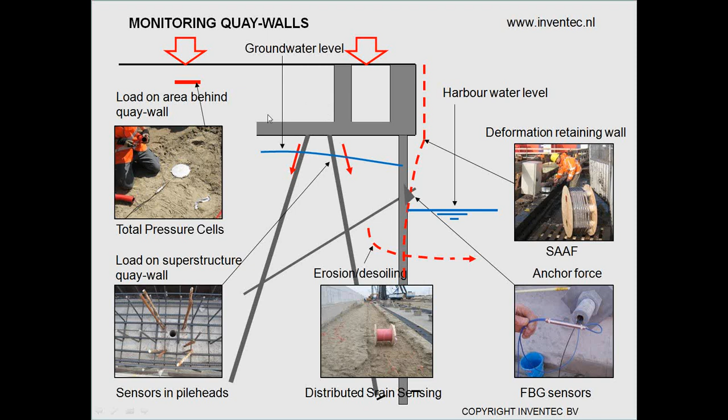And last but not least, of course, the groundwater level in relation to the harbor water level represents an important semi-dynamic load on the whole of the quay structure. On the next slide, it is interesting to ask yourself the question: why should you monitor a quay wall? Generally, there are a couple of reasons that are quite common for structural monitoring: it gives insight into structural condition, it reveals design or construction errors in a timely manner, and it enhances the knowledge on structural behavior.

But there are a couple of things that are of particular interest for quay walls, in particular that it discovers deficiencies that develop with time. This is a tool for scheduling preventive maintenance with the aim of extending the lifespan of the structure and saving on the total cost of ownership. When you start monitoring only when something is really happening, the costs are much higher, and you may still not get the right picture. Then it shows hidden reserves. That is also of interest for quay walls. During the life of a quay wall, its purpose may change. For instance, an ore terminal may become a container terminal, and then there's the question: can it withstand a load that it has not been designed for originally? It can be hard to determine this if you lack the historical structural behavior of the quay wall.

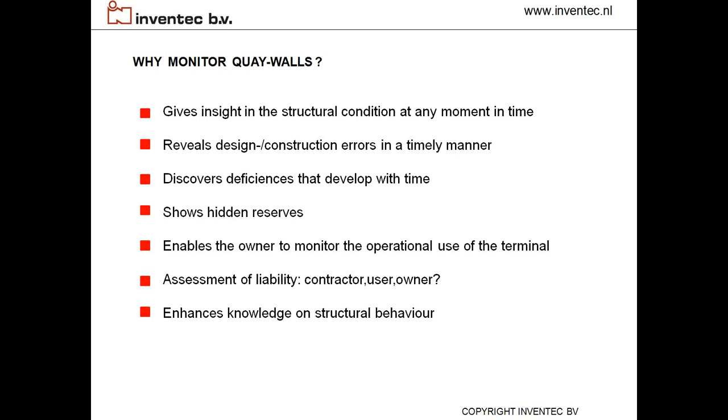Now I would like to go into more detail on the individual monitoring applications. First of all, the potential erosion of the subsoil behind the quay wall. What we apply for this monitoring phenomenon is distributed strain sensing along an optical fiber.

Well, for most of you, it will be clear how this works. It's basically such that a reading unit constantly launches a high frequency pulse of light of a particular wavelength into an optical fiber, and measures the shift of the so-called Brillouin frequency in the backscattered light. If there is a strain on any point in the fiber, the Brillouin frequency or wavelength changes, and

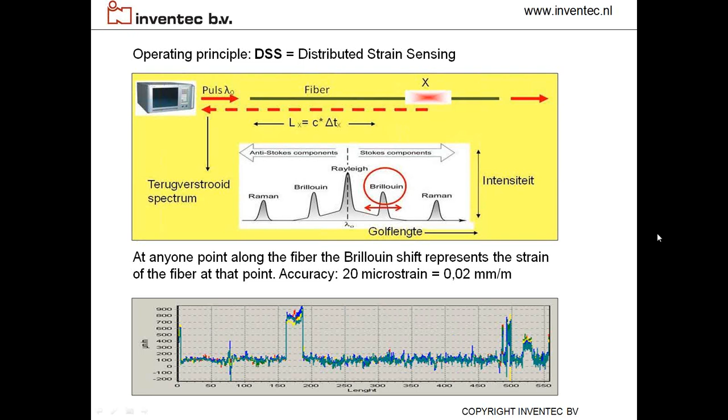And what now happens in actual fact is that the fiber is installed in the soil behind the quay wall, and the strain is a measure for the subsidence or collapse of the soil, or for the erosion. And you see that typically in this case here you see an apparent increase of the local strain, and that is a clear indication that there's a major subsidence in the soil behind the quay wall, which may have been caused by erosion.

This is a true picture of one of the monitoring systems that we installed in the port of Rotterdam, and this is a quay that is 550 meters long. At the spatial resolution of 1 meter, you have the equivalent of 550 spot sensors, and this gives with an accuracy of 1 meter where the erosion or the subsidence is happening.

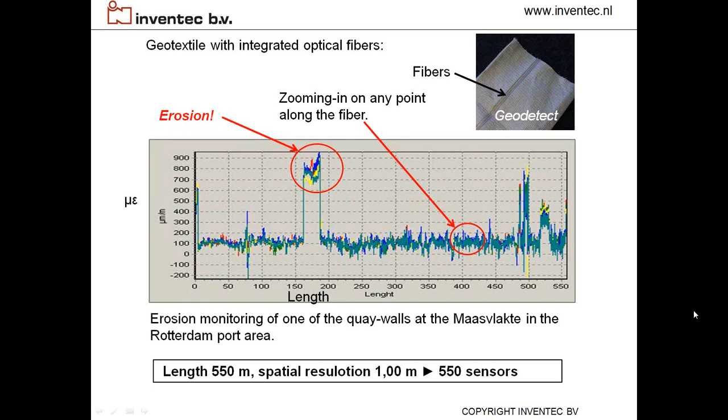And this is how it looks in practice. There are two ways of installing the fiber. You can take a couple of fiber cables, but you can also use an optical fiber that is integrated in the geotextile, which has the additional advantage that it is stronger. The geotextile retains the force, so the fiber does not break even with larger major collapses of the soil.

You see here where we install the fibers. They are installed underneath the structure, but behind the retaining structure.

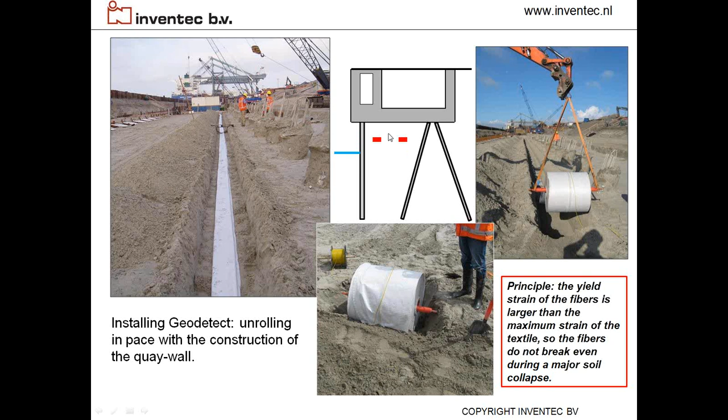Now you could say, well, is this such a big issue? Should we really do that? But I think these pictures that are actually taken from the subsidence of a quay wall in the Rotterdam area show that erosion monitoring is absolutely not an unnecessary luxury. This is, by the way, not an old quay wall. It was a quay wall that had been completed 4 months before. So even in an early stage, these things can easily happen.

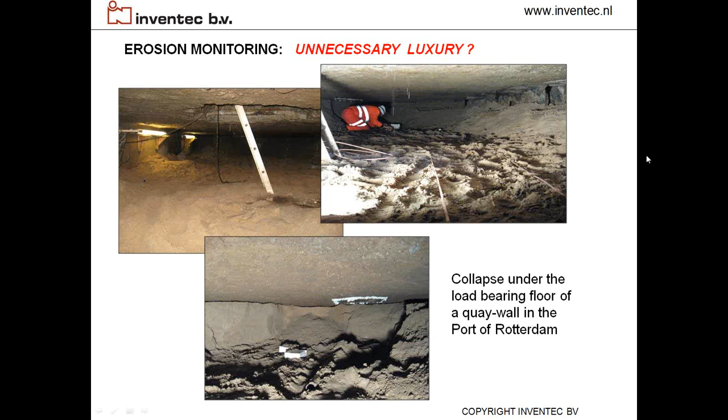And the importance of an early notification of a subsidence is, of course, that you want to avoid major catastrophes. If you don't have a monitoring system, the erosion and the desoiling progresses and can cause a major collapse on the surface of the terminal.

For visualization, we normally use DiView, which is a software package that has been developed by SMARTEC, and it can be used to easily visualize in real time where critical events may be taking place along the length of an erosion monitoring system.

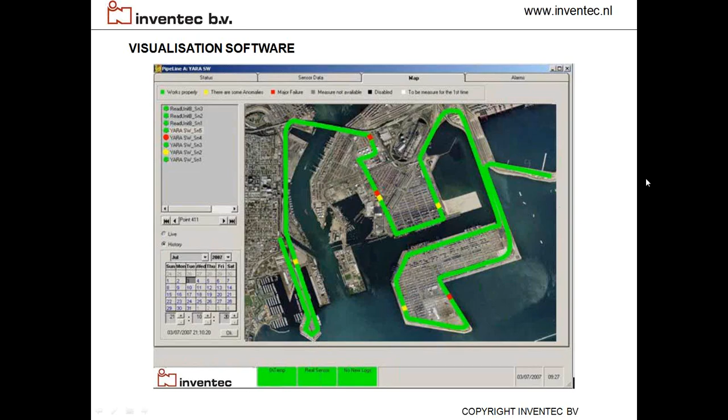And then subsequently the core of the anchor is grouted up with non-shrinking grout. Now after hardening, the grout serves to transfer the strain from the anchor to the sensor.

For the measurement of the pulling force of the anchor, the sensor is typically placed at a relatively short distance behind the anchor bolt, because at that location the anchor is free to move, to strain, as the friction with the surrounding soil is negligible, so that a true relation between strain and force can be established.

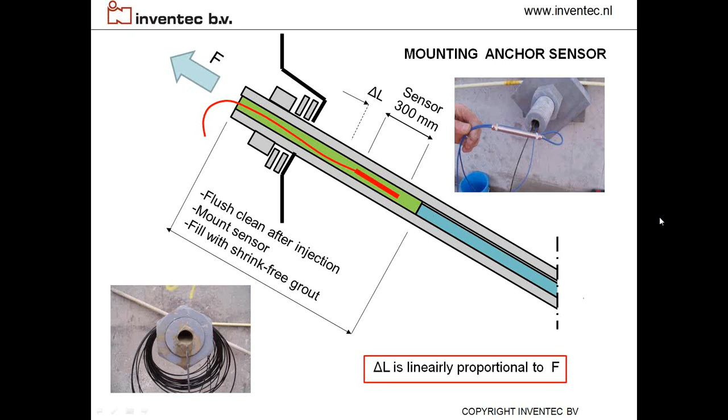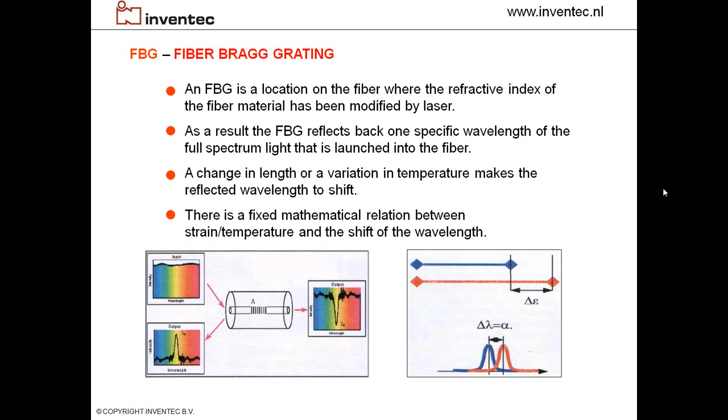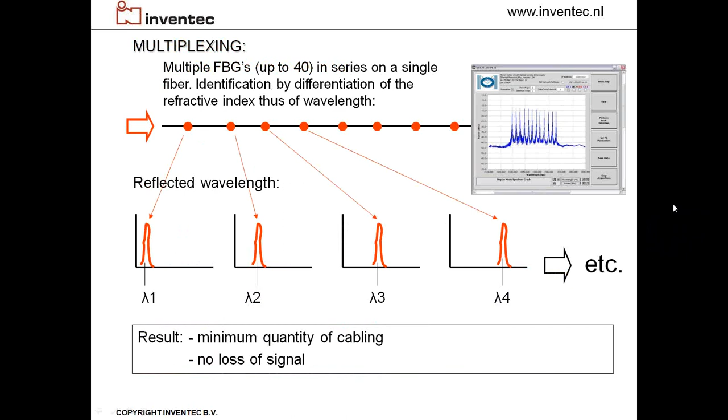The type of sensor we use for anchor monitoring is based on Bragg gratings. I assume that the people in the audience have sufficient knowledge to understand how that operates, so I will not go into further detail about that. Multiplexing will also be a known possibility of FBG sensors.

Sorry. I have to go. No, I have to go back. Yeah.

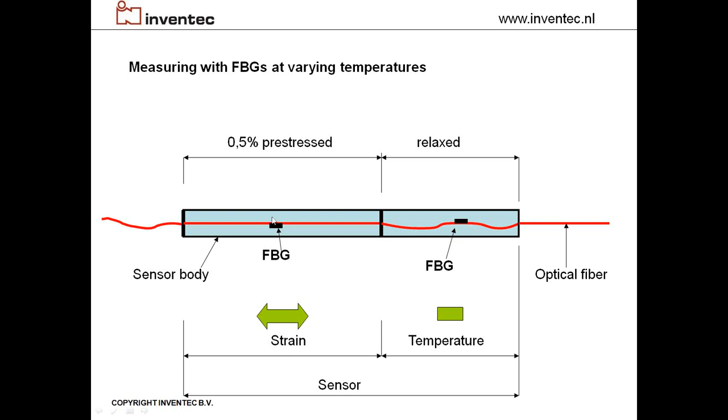The shifting of the back reflected wavelengths is caused by both strain and temperature changes. So you need to have two FBGs in line, one that is relaxed and one that is pre-stressed. The relaxed one only measures temperature, so that you know how much you have to compensate for the sensor that measures both strain and temperature.

Now, the point is that the asset owner obviously is not interested in strain, but wants to see the actual force that is exerted on the anchor. And the conversion of strain into force is done during the tensioning of the anchors in the field. During the subsequent tensioning stages, the strain sensor and the temperature sensor are read out, at the same time marking the force readings from the tensioning jack.

This then establishes the relation between the strain and the force at the time and the circumstances of the tensioning of the anchor. But of course, in the software, the measured strain has to be compensated by the reading of the temperature sensor, and of course also the thermal expansion or shrinkage, as the case may be, of the material of the anchor, so the steel expansion or shrinkage. And that is an exercise that has to be done before it can be made operational.

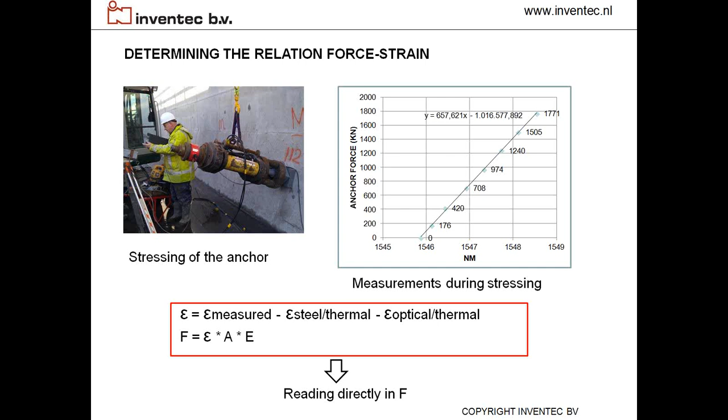For economical reasons, not all anchors will be fitted with a sensor; measuring the forces of only a representative number of anchors along the length of the quay wall will give a representative picture of what is actually happening.

Calibration is done in the field by putting known weights on the superstructure and taking the strain reading from the sensors. And as with the anchor force sensors, also here the strain readings obviously are compensated for changes in temperature. And here also a representative number of sensor containing piles will be sufficient to give the adequate information of how the quay is loaded. And the Port Authority receives an alert or alarm whenever preset levels are reached.

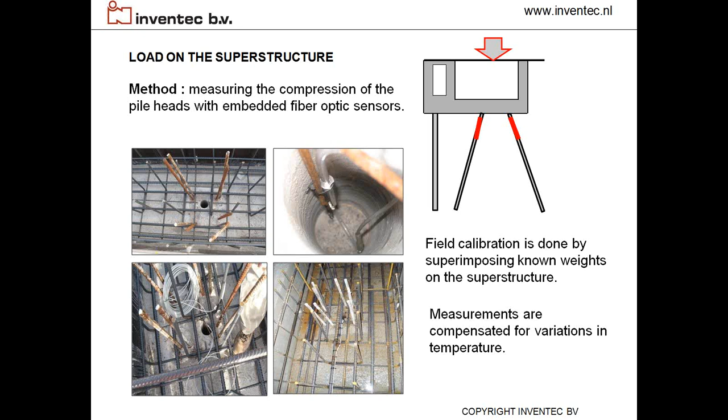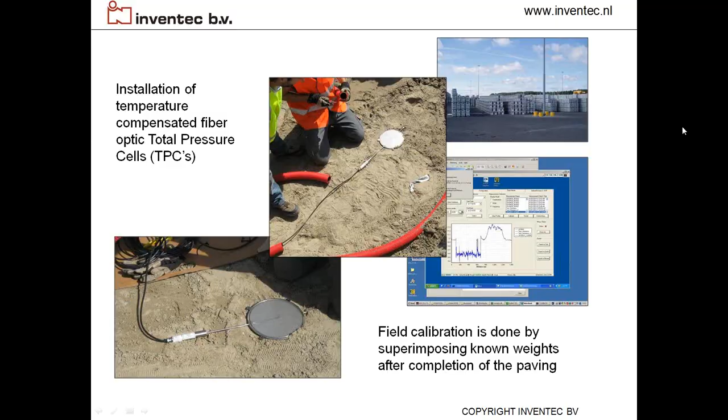Groundwater level and harbor water level. As I already remarked in the introduction, water pressure is an important variable load on the quay structure, and particularly in tidal areas as we have in the Netherlands. The groundwater level can change in itself, but also the tidal effect can be very important. In Rotterdam, you're talking about 2.5 meters. And from a structural monitoring point of view, it is important to incorporate these parameters into the overall monitoring picture. Normally these are piezometers that are put in standpipes, both in the area behind the quay wall and the harbor.

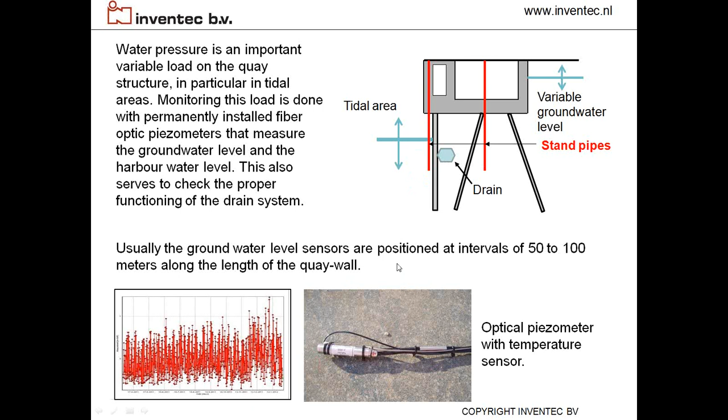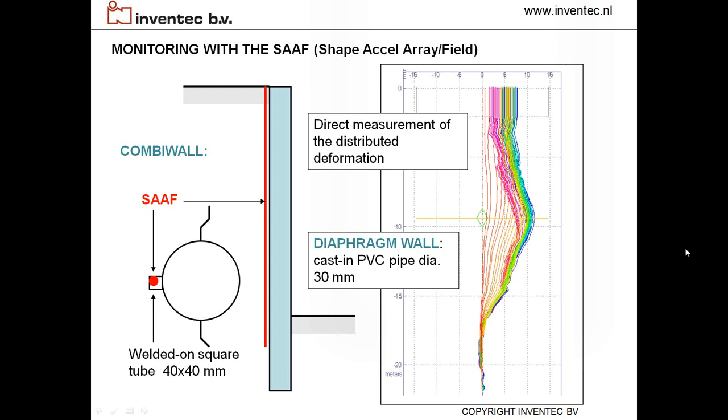And what the SAA does, it provides a direct presentation of the shape of the retaining wall over time. This gives the operating principle of the SAA. It's built up from a number of segments that each contain a triaxial MEMS inclinometer, and these segments are all interconnected in such a way that they can rotate in all directions in relation to one another. And it has a diameter of only 25 millimeters, which actually makes it possible to install it anywhere. And it fits into a pipe of only 30 millimeters in diameter.

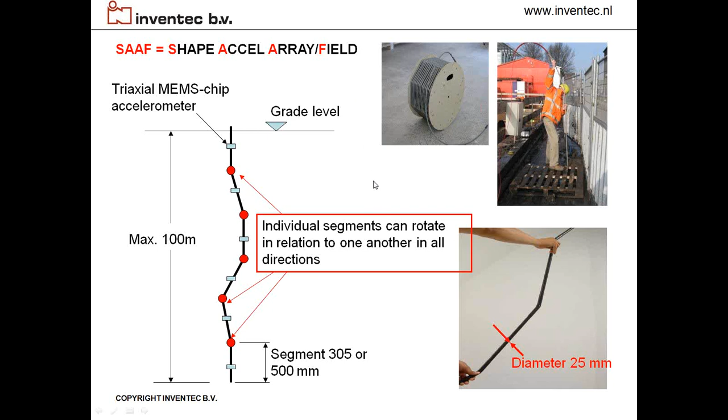In this way you get the exact distributed deformation picture in both X and Y direction, and the tidal movements of the harbor water are clearly reflected in the deformation cycles of the retaining wall. So that means that you see the quay wall moving already during a cycle of 2.5 meters tidal movement.

The second possibility is when you have a diaphragm wall, it is easy to fit the rebar cage with sensors. These generally also can be FBG sensors. They are attached to the rebars, obviously as far as possible from the neutral plane of the cross section. And if you have a number of these FBG sensors in series, you can compute from that the deformation, the shape of the retaining wall at any moment in time.

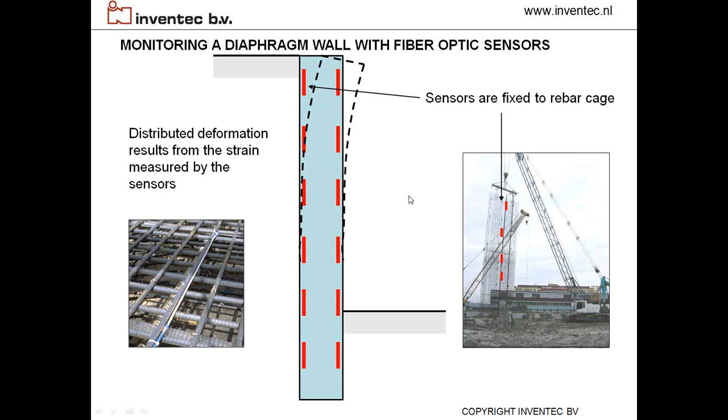Data infrastructure and data management, not unimportant, of course.

This is a typical flow schedule showing the data management infrastructure that we provide. The sensors are interrogated by their respective reading units, which are located in the control room at the end of the quay wall. From there, the data are pushed to a remote server that runs our web application, which we have given the name LiveSense.

Now, the asset owner can log into this web application at any moment in time to view the structural behavior of the quay wall. LiveSense is also programmed to store data in a format and an archiving policy as agreed with the port authority.

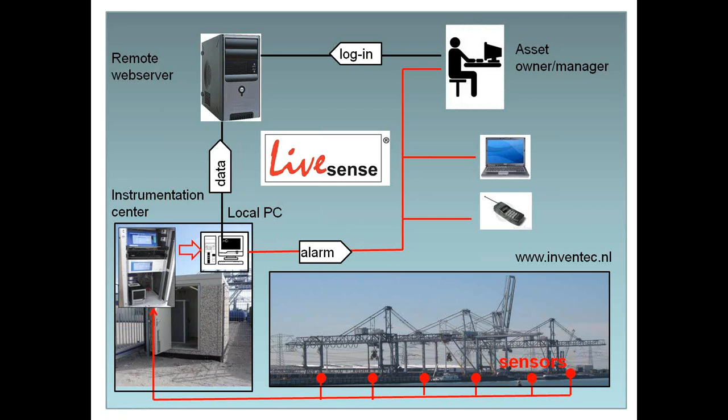And whenever a preset alarm value of any of these sensors is reached, the direct alarm goes from the local control room to the asset owner. So he can, if he wishes, take the applicable measures. For instance, he can call the user of the terminal and say, hey, you are overloading my quay, you're stacking your goods too high.

Now I've come almost to the end of the story. Why measure with light? This is something that is normally included in this presentation, because we often deal with people who are not familiar with it, but it will sound quite familiar to the people in the audience at this moment. Of course, it gives truly distributed measurements. Unrivaled accuracy and resolution, no drift, no loss of signal. You can go tens of kilometers without any booster or intermediary reading unit.

Measurements are not affected by electromagnetic induction, insensitive to a lot of evil things, very small size, minimal quantity of cabling, as I have already explained, unequaled durability, and intrinsically safe, so it can even be applied in hazardous areas.

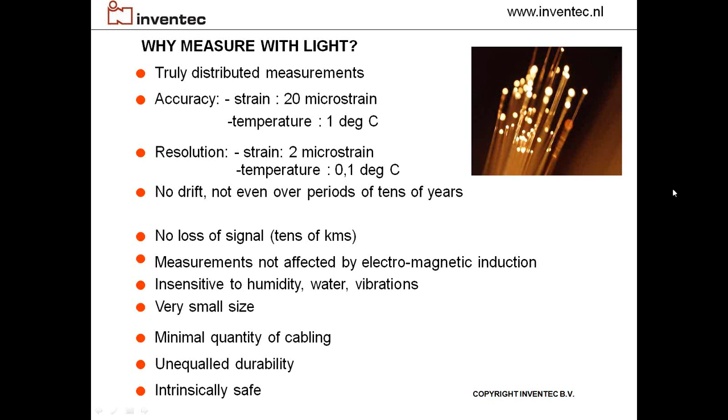Well, by this I have come to the end of my short presentation. I hope you found it useful, and if you have any questions, I'll be pleased to answer those.